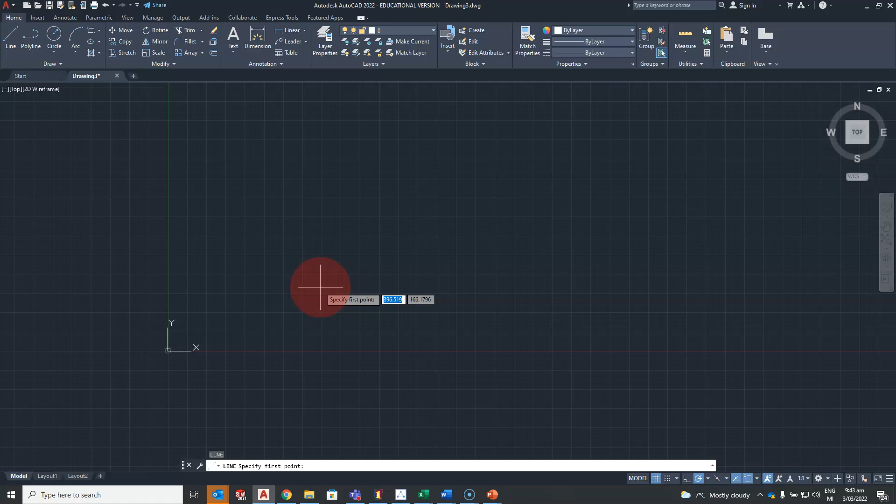And that value that's on the screen at the moment, 450, 420, that's an absolute value. The closer I get to X and Y, the closer it gets to 0. So that's an absolute value. So if I just type 0 and then use the comma, which is like mapping and coordinates, 0 - so that's X0, Y0 - and then hit enter. It has now got a line that is starting from X0, Y0 and coming back to where the mouse was.

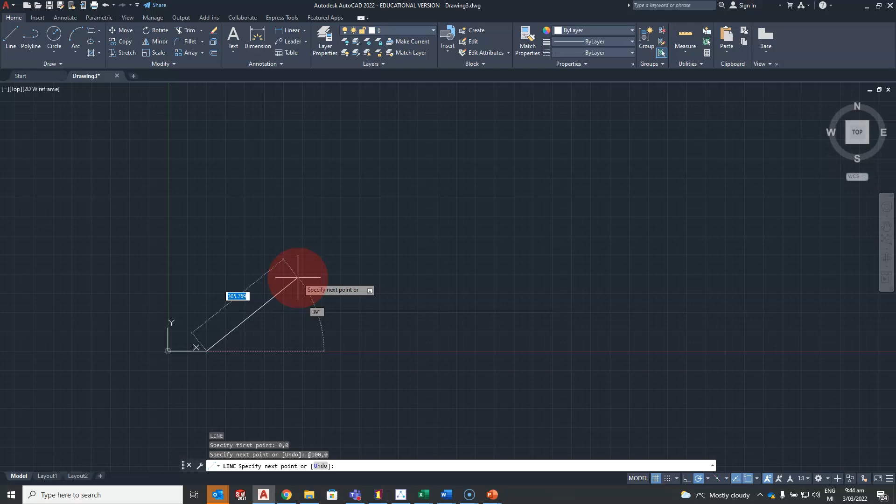And it actually says specify the next point. So if I start typing 100 and then comma on the keyboard, and then type 0 - so 100 on the X, 0 on the Y - enter. It gives me a line that's 100 millimeters long, and it's horizontal because it had a Y component of 0. So then my next point, I still want X to be at 100, comma, I want Y now to be also at 100, enter.

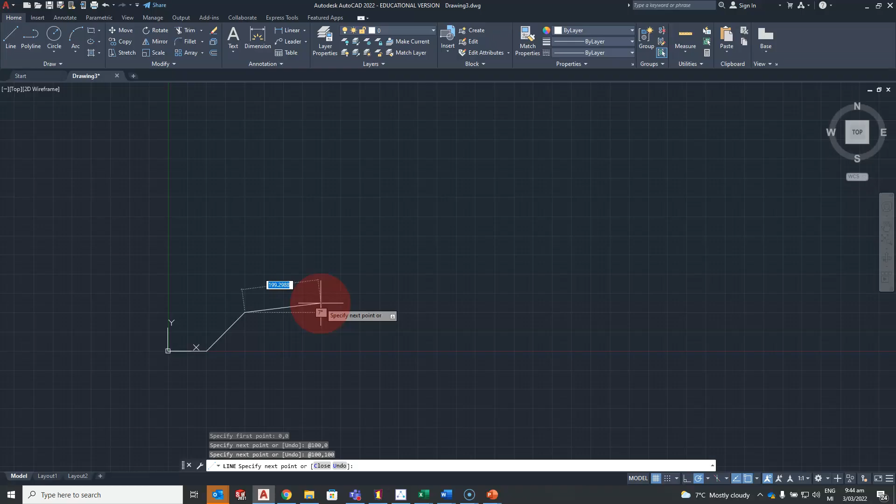Aha, so you see what it's done there is it's defaulted to a relative coordinate. So it's gone 100 from where I was, which hasn't actually done what I wanted it to do. So let's hit escape to stop drawing a line. I'm going to select that line and delete it. I'm going to zoom in a little bit so I can now see it.

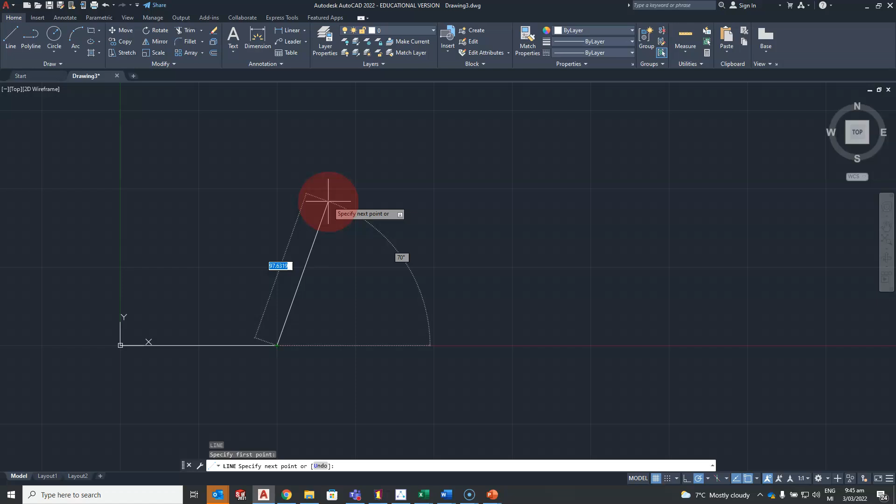L for line, enter. I'll snap to the end of that. Now I want it to go straight up, but I want to use the coordinates. So to tell it that I am using absolute coordinates, I need to use the pound symbol - that is Shift 3 on the keyboard. And this time I want it to be at an X of 100 and a Y of 100.

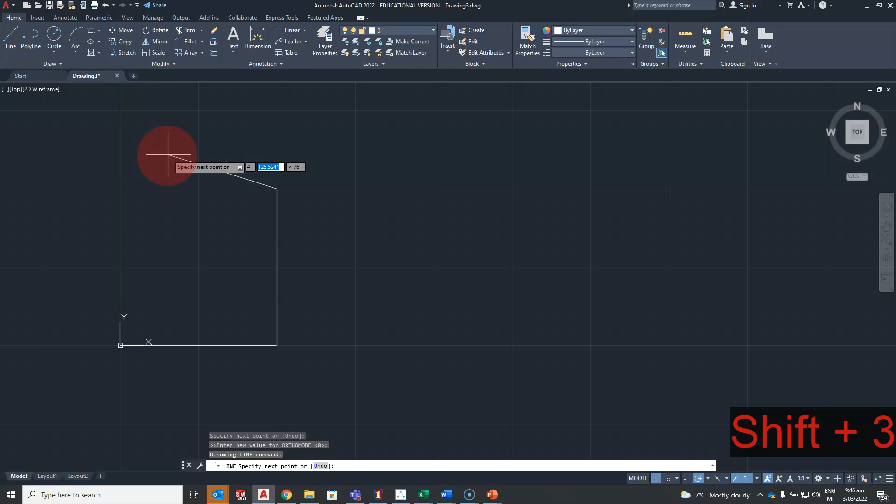So that's the subtle change in the way AutoCAD is now set up. It's defaulted to the relative coordinate system, whereas I want it to be in the absolute coordinate system. So therefore I need to use the pound key - pound, and now 0 in the X, comma, and 100 in the Y. And then I could go back and connect it to there.

So it used to be absolute values by default, and you didn't have to put the pound key in or use the pound symbol. Actually, absolute coordinates aren't used as often anymore anyway, which is why it's now set up as defaulted to relative.

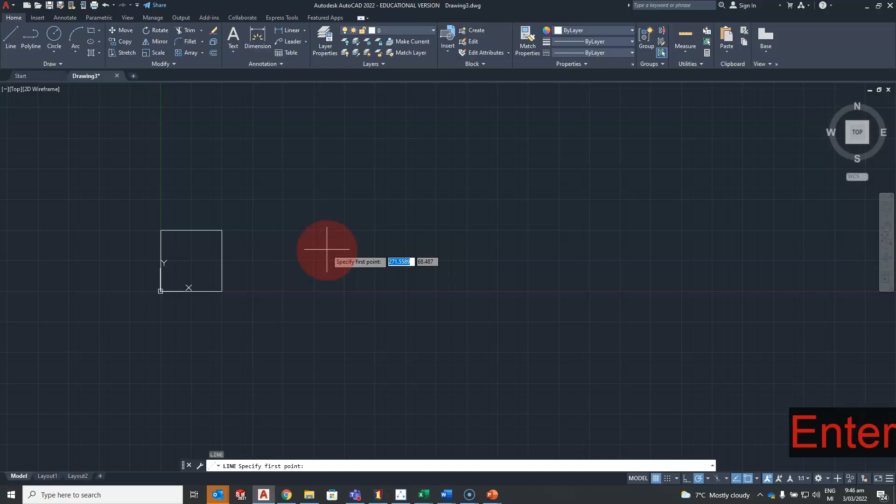So if we now look at a relative coordinate, let's start my line again, enter, and for my very first point I'm going to use absolute coordinates. Instead of starting right at 0, because I already started there before, I'm going to start at 200, y 0 - so it's 100 away from where I finished the last one.

So using relative coordinates now, if I type in 100, comma 0, it has come along 100 from where I was. Relative means it is relative to where you were. So now I'm at this point down here.

So if I want to do a line that goes straight up using my relative coordinates - relative to that point - x should be 0 and y would be 100. And it's gone straight up. So there was no x component and there was a y.

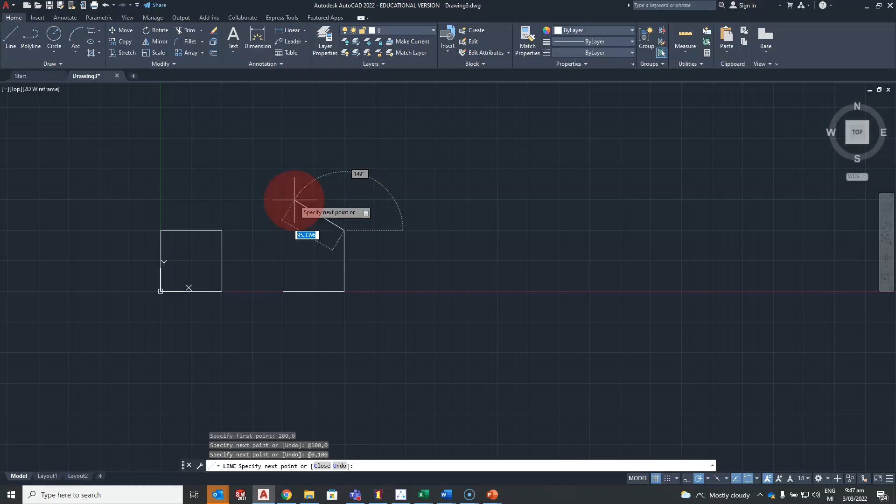Now if I want to go back this way, again using relative coordinates, relative to that point where I was, it would be negative 100, comma 0. And I could go back and join onto there.

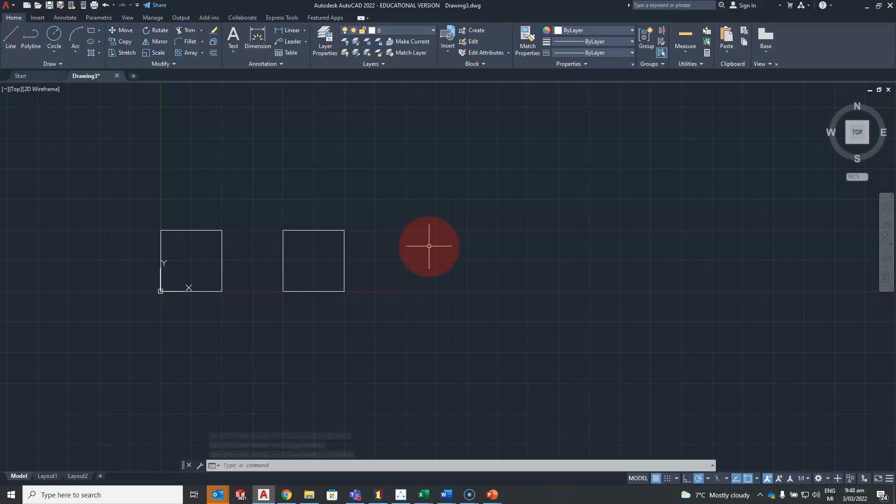Now you've probably noticed I've had numbers on the screen the whole time. I've been ignoring them a bit and overriding them by using the comma on the keyboard, which overrides those numbers and changes it back to being a relative or absolute value. But I actually don't need to do that anymore either.

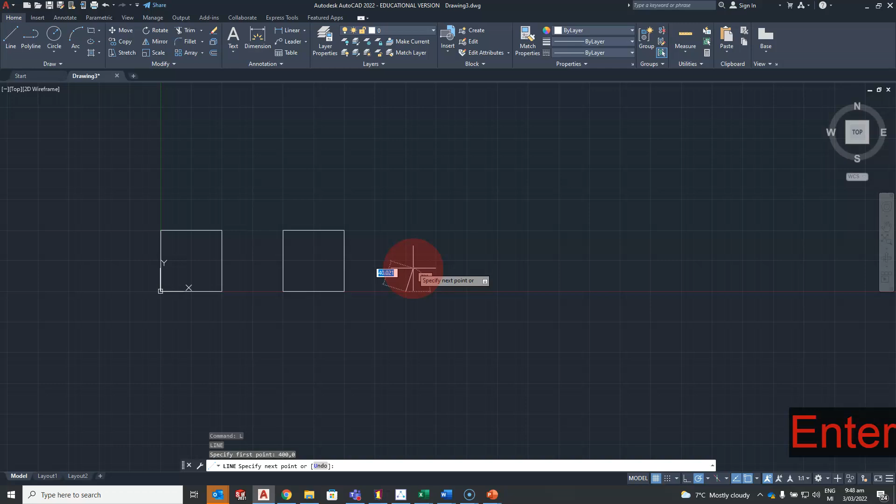So if I start a line again, and this time let's start at 400 on the x, 0 on the y - so we'll start here. Now you can actually see I've got some numbers there: a highlighted blue value that's changing, and also an angle that's changing.

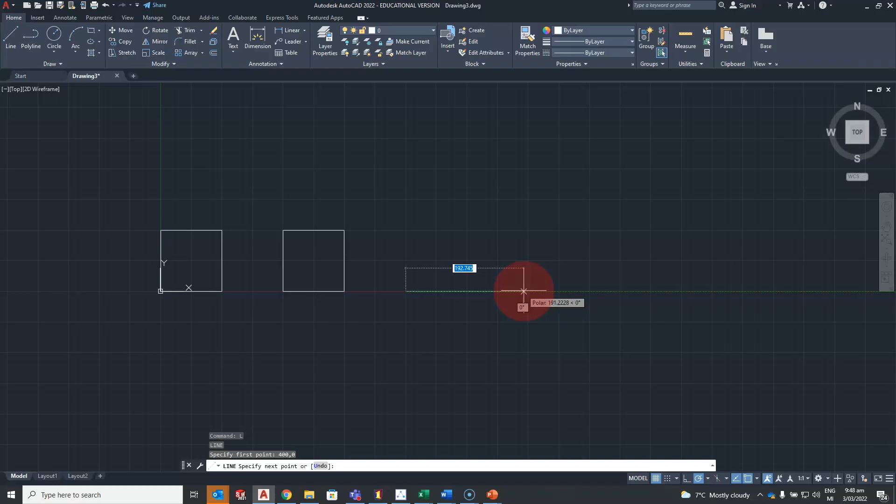So what I can do is come down here, and when it's on this green inferencing line, you can see the angle is 0. So I could then just type in 100, and I get a line that's 100 long. If I come up here on this green line, 100 again, and so on. It's actually very quick and easy to draw that box now with the modern tools the way they're laid out.

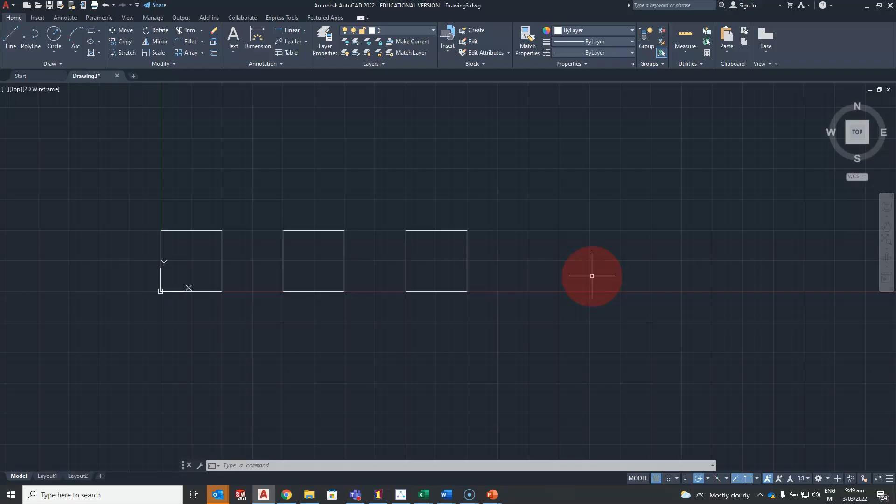So if we then want to draw the shape using polar coordinates, start again, L - where are we now? We're about 600, comma 0. Okay, so polar coordinates refer to degrees or an angle.

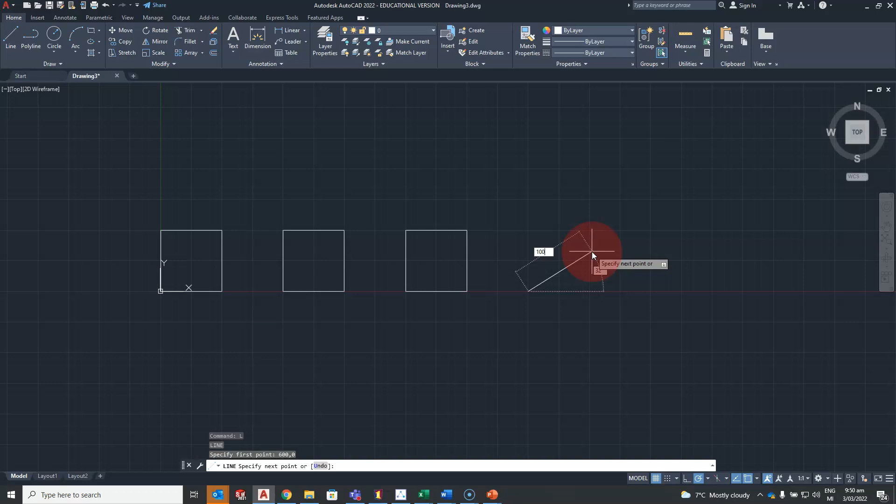We're rotating around a pole, and again it's set up to be relative. So if I'm going for an angle - 0 degrees is this way - I'll type in 100. Then if I want to define an angle, I use the less than symbol, which is above the comma on the keyboard, so it's easy to remember. I'll put in an angle of 0 degrees.

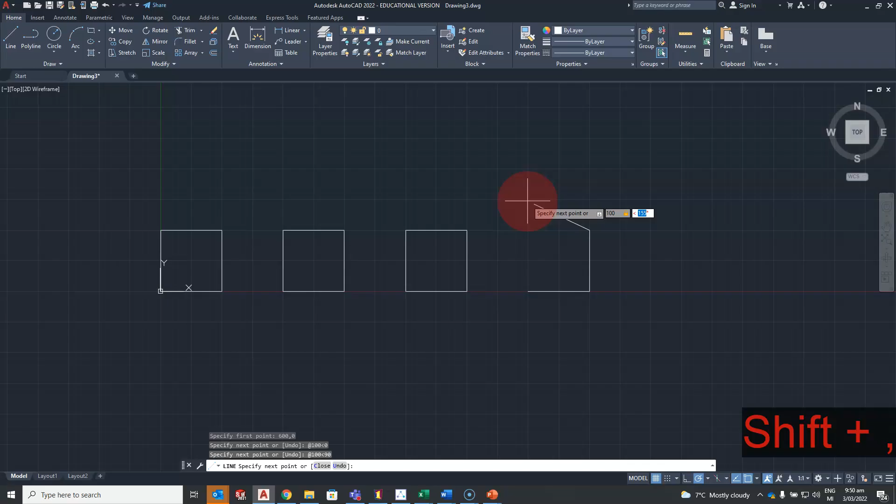So now if I want to go up that way, 100 long, the less than symbol, 90 degrees. Again, 100, less than, and since 0 is horizontal heading to the right, 180 degrees will bring us back to there.

Again, those polar coordinates we can do without actually using the symbol on the keyboard now. We can just type in - we can see it on the screen - that 100. I can type in 100 and then tab to the angle that's on the screen and hit 0, and we can do it that way.

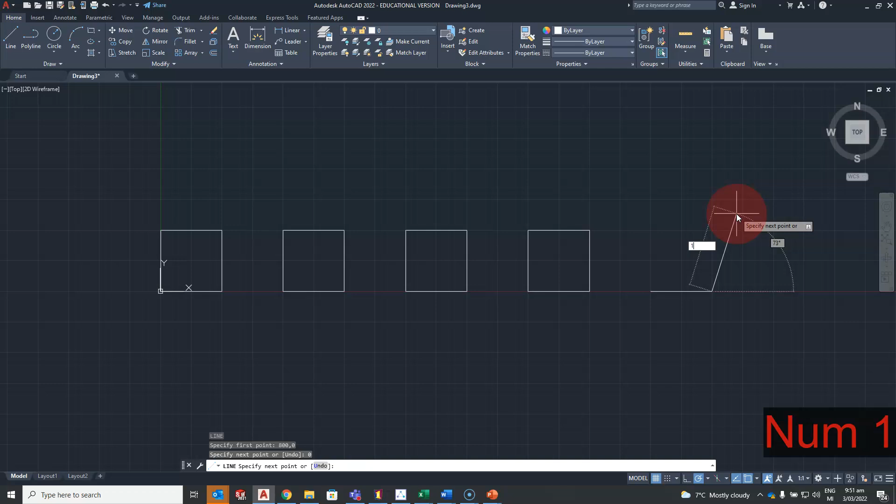100, tab, 90. 100, tab, 180 - whoops.

Okay, so the key thing with drawing in AutoCAD is accuracy. You've got to be in control, you've got to tell it what you want, you've got to feed in the values, you've got to tell it the angles - you've actually got to be in control of what's going on.

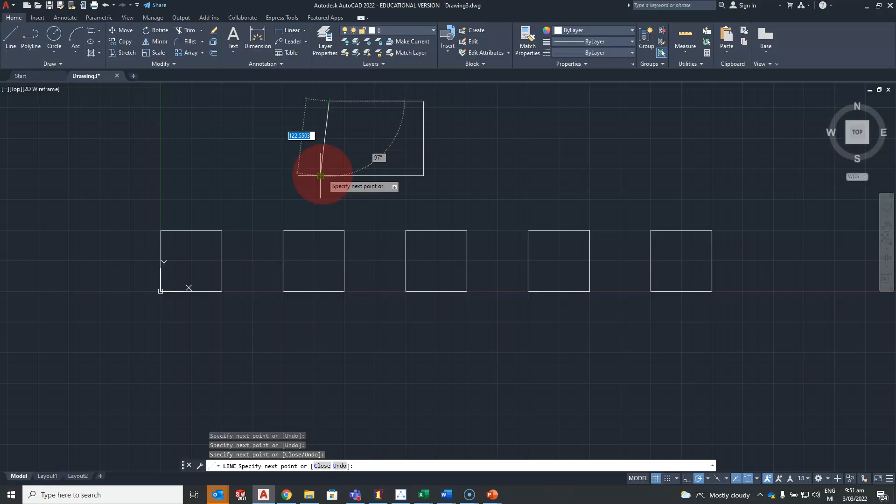Because it's very difficult to come back later and add the accuracy in. If I just randomly draw a line like this, and then I want to come back and say, oh, I want this to be 100 - it's actually quite a mission to accurately turn that back into 100 again. So if you know what you need it to be to begin with, it's much easier.

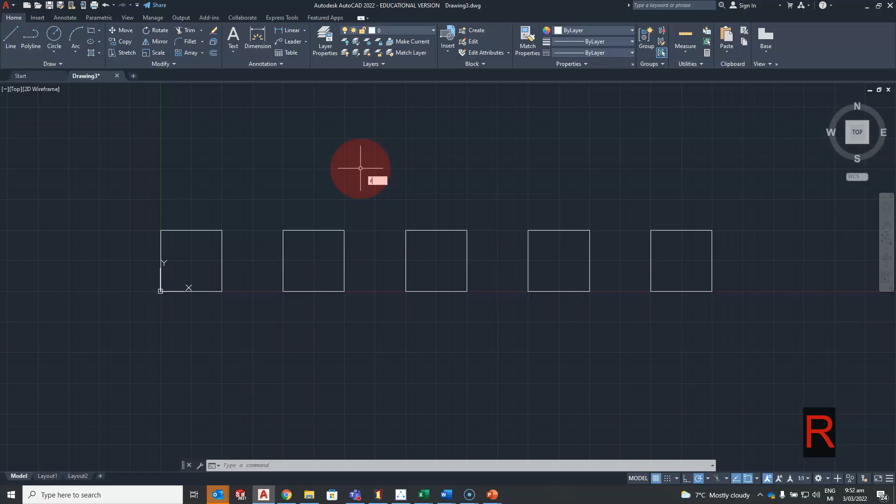And then I've been drawing these squares using 4 separate lines. There is actually also a rectangle tool - up here, rectangle, or we could type in REC. I'll just choose a random point to start with.

Again, we're talking about relative coordinates essentially now, but you can see I'm getting an X and Y component, so I can type in an X of 100, tab, and a Y of 100.

And we can draw this rectangle in one tool, and you can see it's actually selected as one item, whereas these are individual lines.

Okay, so that's an introduction to the coordinate system and drawing using that coordinate system.

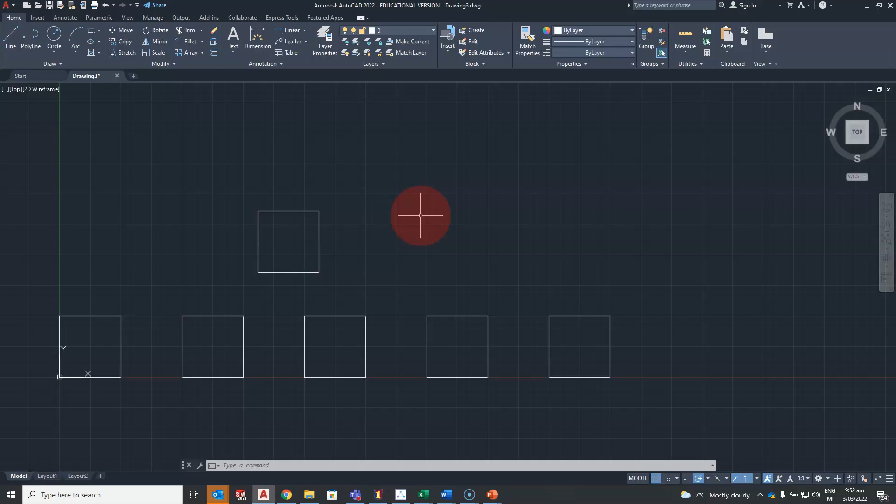The last thing to think about when drawing lines and making sure they're horizontal and vertical is a thing down here called ortho mode. What ortho mode does is make sure your lines are either horizontal or vertical. See, when I move the mouse, it's staying horizontal. If I come all the way up here, it'll stay vertical.

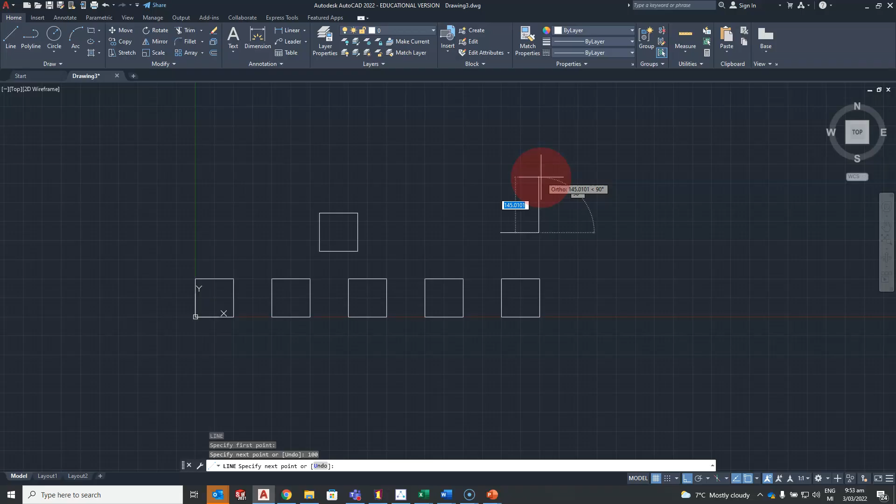So again, I can type in 100, and then it's automatically vertical, 100 again. Ortho mode is very, very useful to make sure when you're drawing lines that have to be horizontal or vertical and need to be accurate, you don't have to rely on that green inferencing line - you can make sure it snaps to that.

Beside that, there's also polar tracking, and with polar tracking you can make it stick to certain angles. So now you see it snaps to 30, snaps to 60. That's also quite useful if you're wanting to draw things at set angles.